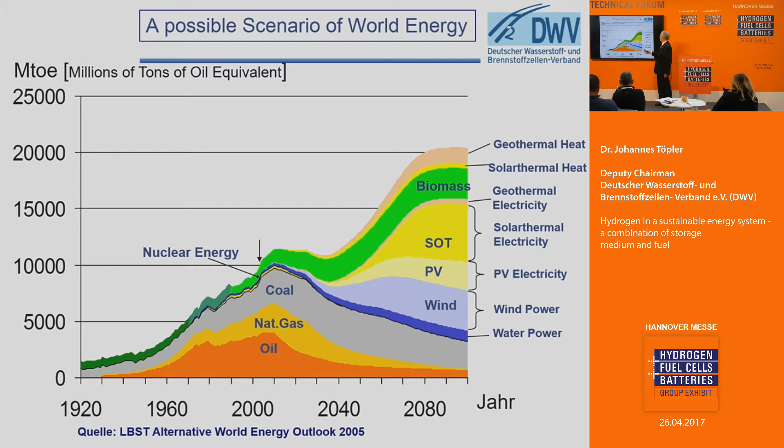Our old energies—oil, natural gas and coal—will decrease in resources, and in future we need other renewable and sustainable energy systems. We have to introduce them before the decrease of availability, due to climate change and natural damages. We have wind, photovoltaic, solar thermal energy, biomass, geothermal heat, and so on. These are the primary energy systems of the future.

If we put this figure in another color, you see the old, conventional energies are generally such that the energy is stored in matter. Future energies will be transferred from wind and solar energy into electricity in the first step, and electricity is the first energy which can be used industrially. That means we have a strategic transfer from a fuel-based energy system to an electricity-based energy system.

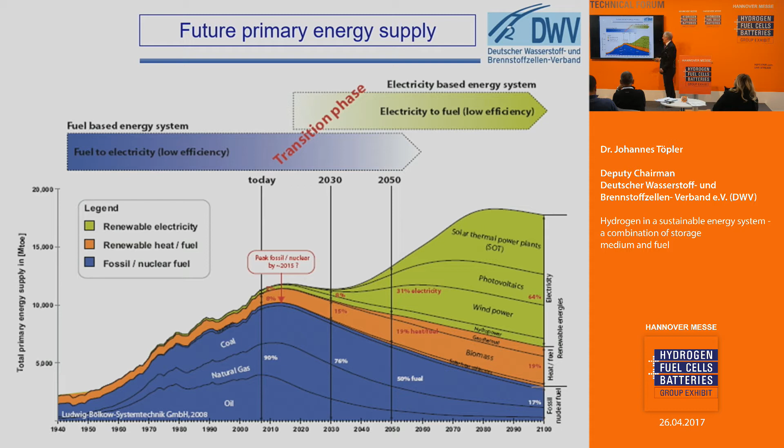In this system, we have to produce electricity, and we have electricity, and we have to transfer in the first step the electricity to fuels. That's the first strategic difference from one energy system to the next one.

Another difference is availability. If energy is contained in matter, it is available everywhere and everywhen. But for example in wind energy, demonstrated here, and in solar energy, we have fluctuations. In the first measurement, the fluctuation of wind energy was recorded several years ago in the E.ON grid, and you see here the fluctuations.

In Germany, we have legislation to increase wind power by a factor of 3 till 2020. If we calculate this, it is the same fluctuation, but with the wind power as it will be available in 2020. In the next curve, we have the vertical load—that's the fluctuation of the load in the network—and you see here the differences.

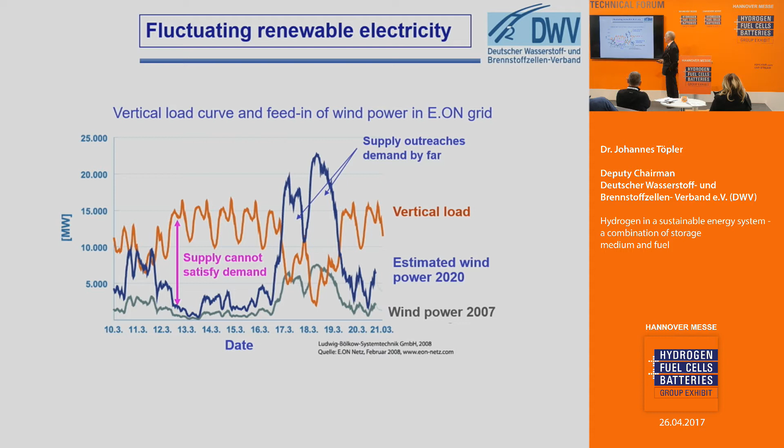In this time, the supply cannot satisfy demand, and in this time, the supply outreaches the demand by far. That means we have no parallel situation between demand and supply. And what we need is storage in between.

The storage can be used in the following way: from electricity, for example from wind or from photovoltaics, we can use electricity in the electrical grid, and this can be used in household and industry at the same time. But if we do not have enough energy from the wind, we have to use additional storage systems. There are different storage systems, but I will demonstrate it in the first demonstration by hydrogen.

The first step is to make hydrogen by electrolysis. You can use hydrogen in the filling station for electrically driven cars with fuel cell, in the same way as you can use direct electricity for battery-driven electric cars. And you can store this hydrogen in big storage systems like caverns, and withdraw the hydrogen for filling stations or other applications, for example in households.

In this situation, you can use the hydrogen directly, or inclusively via methanization, for example by synthetic natural gas. That's another option, but I will show you how it works and with which efficiencies. After this storage, you can stabilize the electric network by re-electrification of hydrogen via turbines or fuel cells. That means you have a closed energy system for a continuous or demand-orientated supply of households.

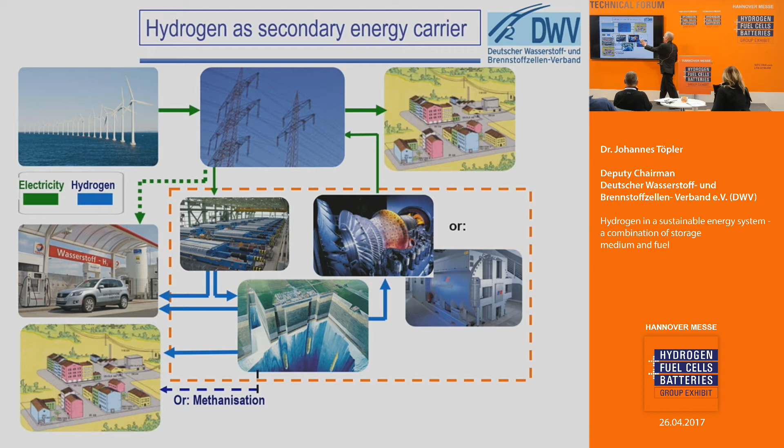You can use the electricity naturally, and on the other hand, if you need heat as final energy use, you can use the energy via a gaseous grid. You have here an electric grid and a gaseous grid in combination via this storage.

The next question is how big a storage system must be. In the first step, we have in Germany available pumping storage systems with an energy storage capacity of around 5 gigawatt hours and an electric power of around 1 gigawatt. This is the storage area which demonstrates the time that can be needed and the power.

In the same way, we have available adiabatic compressed air systems. Both pumping systems and adiabatic compressed air systems make use of potential energy. The adiabatic systems have around 23 gigawatt hours capacity of energy and around 1 to 2 gigawatts of electric power.

On the other hand, hydrogen is a chemical energy carrier, not potential energy—a chemical energy carrier with a reaction energy from hydrogen to water. In the case of hydrogen, a big cavern has a storage capacity of around 1,300 gigawatt hours, or 1.3 terawatt hours, with a power of several gigawatts. That means the storage capacity in the case of a chemical energy carrier—in this case hydrogen, the simplest chemical energy carrier—is very, very big.

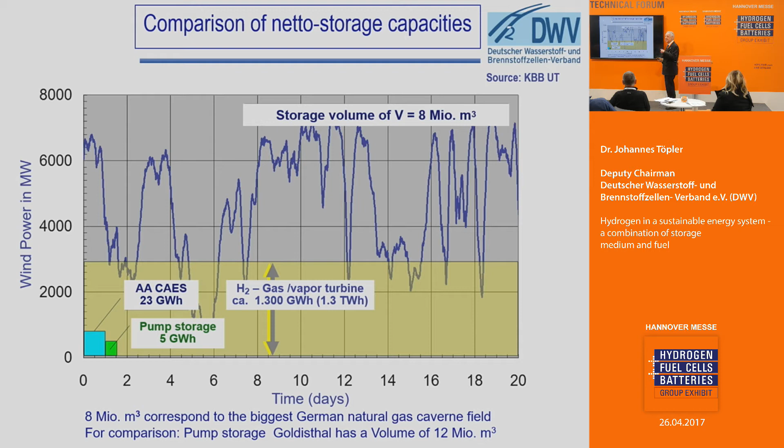And if we have no wind or less wind for a long time of several days or a week, we can store the energy for industrial or household application for several days. And that's what we need, because of the fluctuations of natural primary energies.

And here you have a demonstration for the energy density per cubic meter. Hydrogen has an energy density of around 300 kilowatt hours per cubic meter with a compression of around 120 bars. And if you subtract the efficiencies, the reversible energy density of hydrogen is around 170 kilowatt hours per cubic meter.

In adiabatic compressed air systems with around 20 bar pressure difference, we have a density of 2.4 kilowatt hours per cubic meter. And in the case of pumped hydro systems with 300 meters, we have around 0.7. The difference results from the fact that here is potential energy, here is chemical energy.

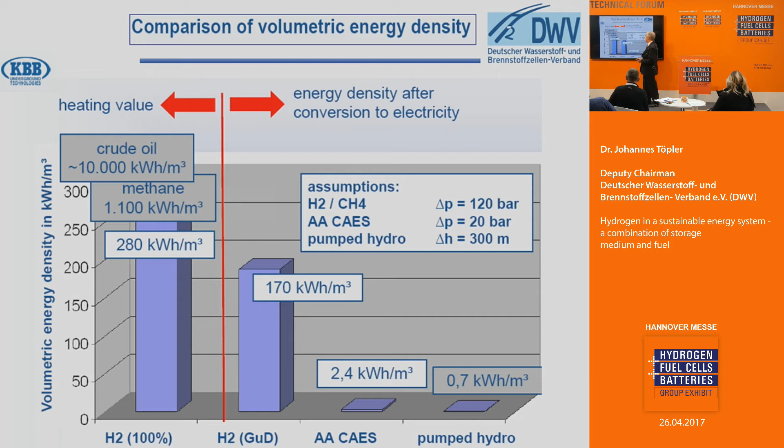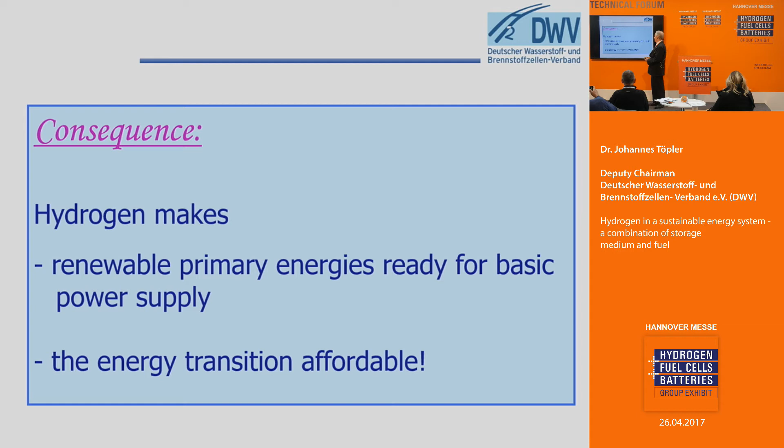That means, in consequence, hydrogen makes renewable primary energy ready for basic power supply, and it makes the energy transition affordable because you can use basic power supply. And the next step is to use hydrogen, for example, in mobility.

And the best way to use hydrogen for mobility is a fuel cell. I think everybody of you knows this. And hydrogen is stored, in general today, in technical applications, by storage vessels.

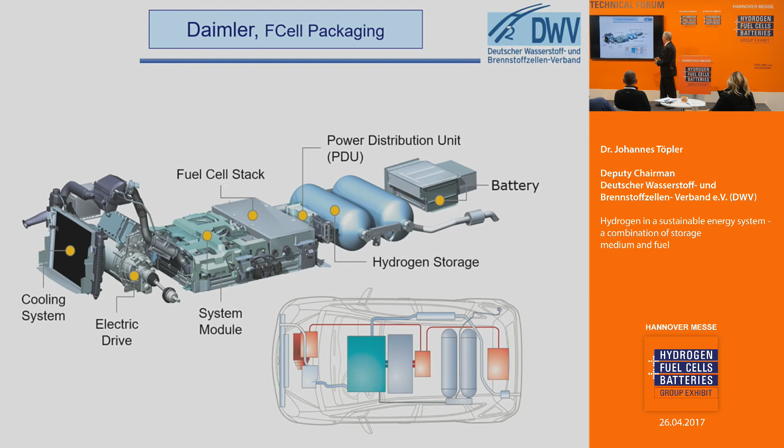The electricity is produced by fuel cells. And here you have the electric engine. And every fuel cell car has a subsidiary system with a battery for the rewinning of braking energy or for heating the car. And one of the first companies who made these cars were Daimler.

They started several tens of years ago. And one of the last ones is the B-class. And this car was constructed, fabricated and approved under serial conditions. Then it was tested by a tour in 125 days around the world, covering 30,000 kilometers.

Daimler wanted to demonstrate the serial application. The next step will be a new car. It was not presented in public, but 2 years ago the engine block with fuel cell and fuel cell system was shown here at the Hannover Fair, and the car will be introduced at the end of this year.

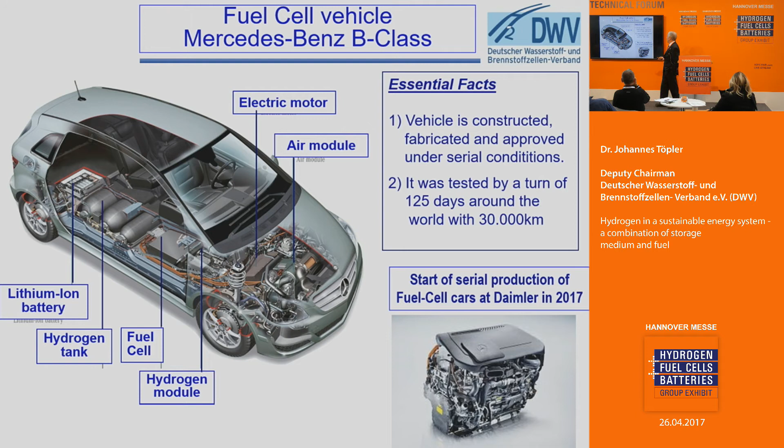Other companies, for example Toyota, are a little bit quicker. Toyota has the Mirai just on the market with a similar packaging to the Daimler B-Class. It's a little bit similar, with 2 storage tanks, with battery, with fuel cell, with electric engine. The packaging is nearly similar.

And now let me say some words with respect to battery-driven cars. For example, if you have a gasoline or diesel car, you have to take fuel with you, and you use the oxygen which you need for burning from the atmosphere, and you release carbon dioxide and water vapor from exhaust into the atmosphere. What you have to take with you is gasoline or diesel.

In the case of a hydrogen-driven electric vehicle, you have to take hydrogen with you, and oxygen is withdrawn from the atmosphere, and water vapor is released after the reaction. You have to take hydrogen with you.

In the case of a battery-driven vehicle, you have the reaction of the anode. This is one example for a lithium battery. You have to take, for each electron, here is the electron output from the cathode, here is the electron input at the anode side. You have to take, for each electron, a molecule of lithium carbide, and at the cathode and the anode a molecule of lithium manganese. At the anode, for each electron, a very heavy molecule.

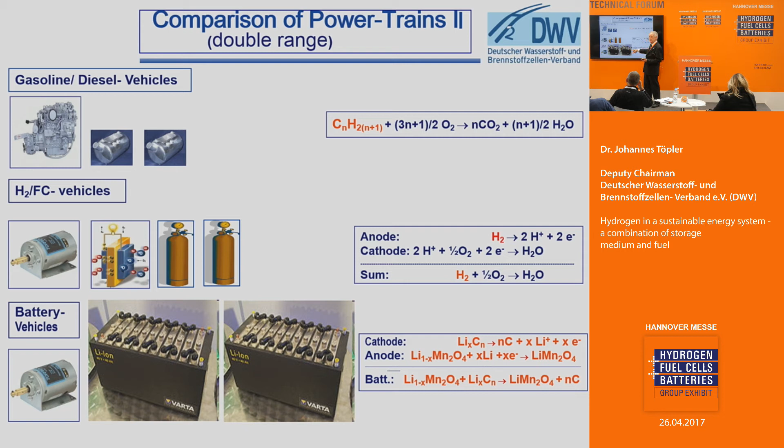The battery has a very, very high efficiency, higher than the fuel cell. But on the other hand, you need additional energy to operate and to transport the battery. And I told you that in general, a battery is additionally used in a fuel cell car. The reason is the following.

You can take the electric engine as a generator if you want to brake, and this additional electric energy from the generator can be used in the battery so that you have a recovery of braking energy. On the other hand, additionally, if you have a battery-driven car and you want to heat your car in winter, you lose range. You have fewer kilometers available.

In the case of fuel cell-driven cars, you can use the fuel cell for preheating the car before driving, because you can operate the fuel cell, put the electricity in the battery, and heat the car before you drive. And when driving, you take the electricity from both battery and fuel cell, and the battery afterwards is empty, and you can refill it in the next operating mode without losing propulsion energy.

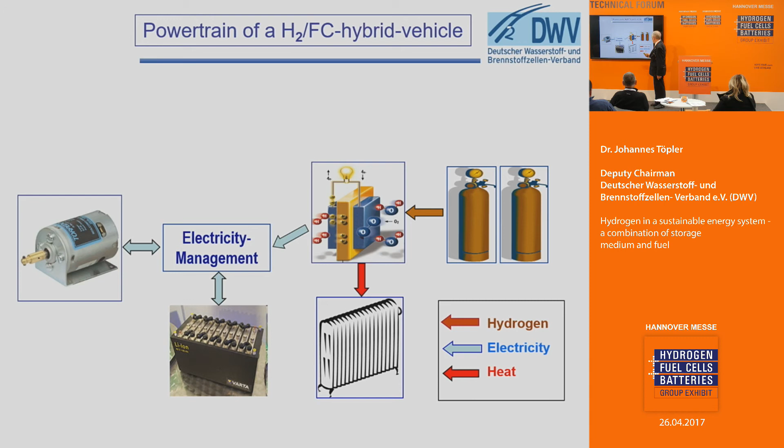Several years ago, the battery companies, car manufacturing companies, and a lot of companies in Europe investigated where battery-driven electric cars have advantages and where fuel cell cars do. And they found altogether in a European project that in the compact class with low ranges, around less than 10,000 kilometers per year, and medium classes in this range, battery vehicles have more advantages, and in the case of big cars and big ranges per year, the fuel cell vehicles, hybridized with battery but generally operated with fuel cells.

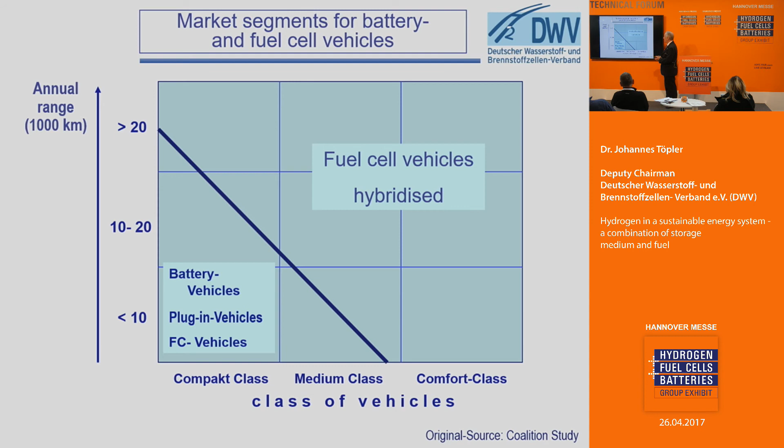And recently we heard something about improvements with batteries, but this means that maybe this line can be shifted a little bit in this direction, but not more. And that's the case which we may have today. And I told you another thing. I told you that even if you have hydrogen, you can make synthetic natural gas from it by the so-called Sabatier process, and you can use conventional natural gas vehicles.

But in this case, you have to look a little bit at the efficiency. A fuel cell has a typical efficiency curve like this. That means at low load, for example, in the general operation range of a passenger car or of a bus, you have very high efficiencies in the case of the fuel cell. And in this operation range, you have low efficiencies for a diesel or a gasoline car. That means for passenger cars, buses, trucks, the hydrogen operation with fuel cells has high efficiencies.

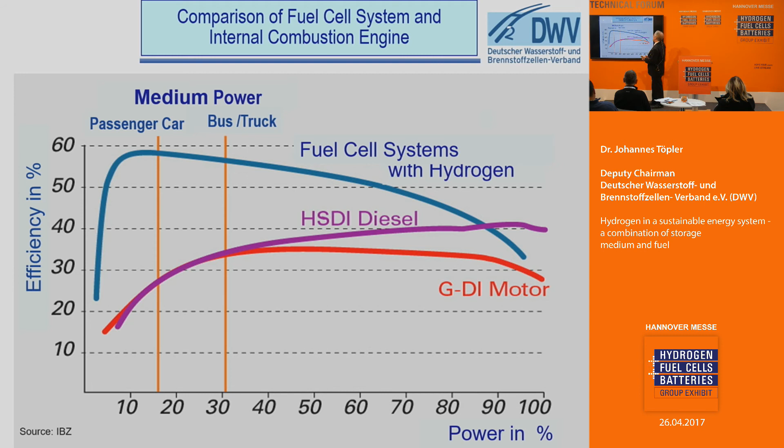And if you have hydrogen and you want to produce synthetic natural gas from it, the best way to use it is with vehicles which are running mainly at very high power density. Those are, for example, trucks or long-range buses. These are urban buses, and here are long-range buses. In this operation range, conventional vehicles have similar efficiencies in comparison to fuel cell cars.

And some people have the opinion that if at the early beginning wind energy is available in surplus, it doesn't cost anything, and then the efficiency doesn't matter so much. But on the other hand, if you compare both paths, producing hydrogen via electricity, compressing hydrogen, and using hydrogen with high efficiency for the propulsion system of a car, you have a final efficiency over the whole process of around 29%.

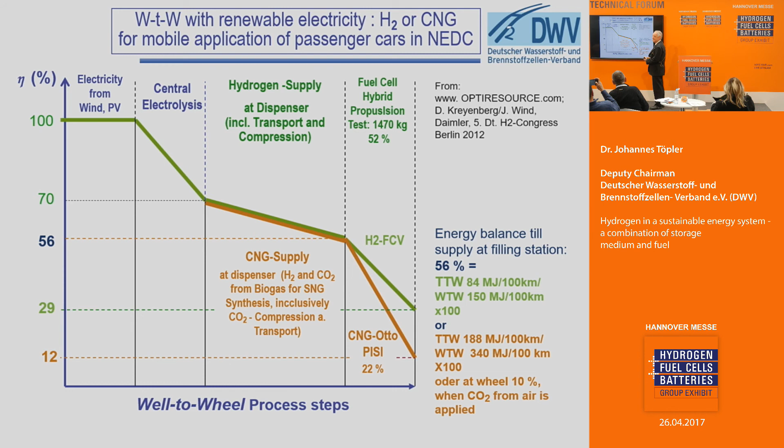And if you take the Sabatier process from hydrogen, producing synthetic natural gas and using it with less efficiency in an internal combustion engine, a gaseous engine, we have here an efficiency of around 22%, so that finally in the whole chain you have 12. If you consider the price, which is 0 at the early beginning, then at the end the price doesn't matter. But an energy specialist generally calculates from the opposite direction.

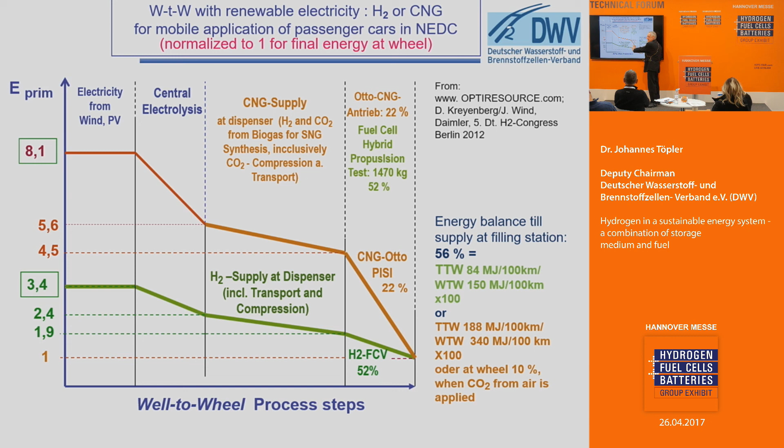I need the energy for propulsion at the wheel of a car. And if I calculate the efficiencies back, then I find how big a wind energy system or a photovoltaic system must be in order to get one energy unit at the end. That means I have much bigger investment cost for the size of the initial system, wind or photovoltaics. That means the efficiency of the fuel cell is the main difference and the main advantage for operating a fuel cell car.

And if you want, you can calculate the differences between different propulsion systems yourself on the internet with the system OptiResource, which was founded by Daimler in cooperation with several universities. If you search Google for OptiResource and Daimler, you will find it. There is an English description or a German one, and you can use the efficiencies and the carbon dioxide emissions for each energy source, for each fuel, hydrogen, electric energy, for example batteries, and for each type of car and propulsion system.

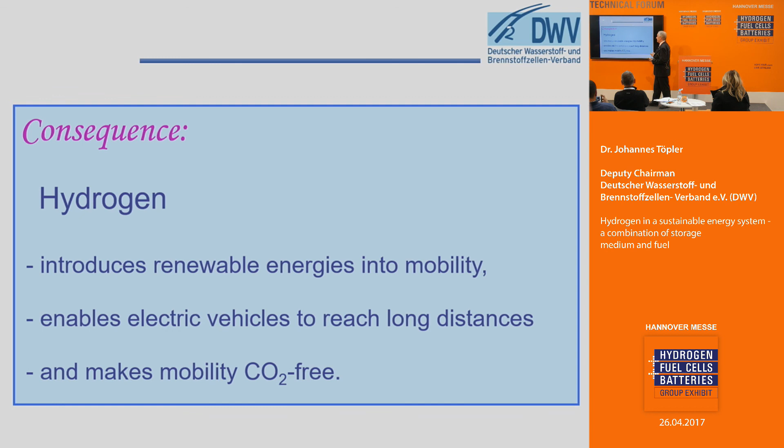The consequences: hydrogen introduces renewable energies into mobility. It enables electric vehicles to reach long distances with short filling times, and it makes mobility carbon dioxide free.